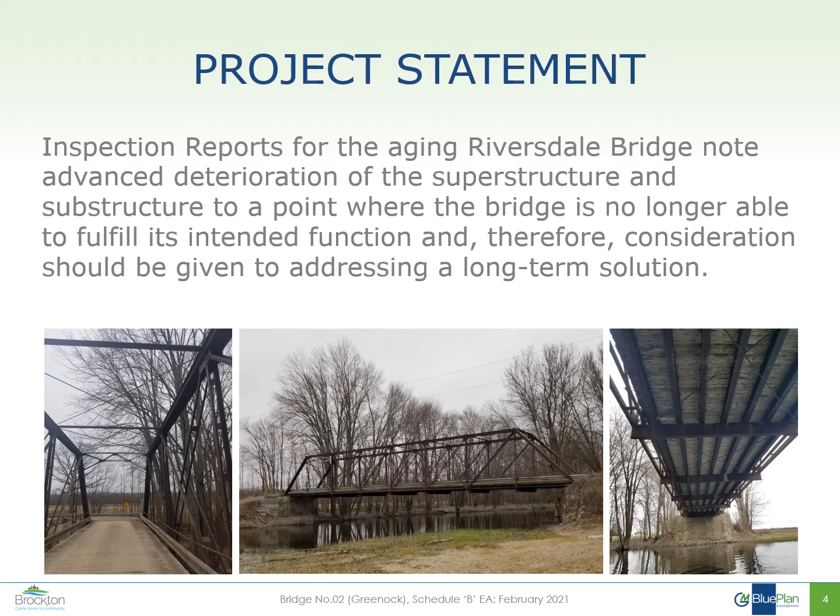Inspection reports for the aging Riversdale Bridge note advanced deterioration of the superstructure and substructure to a point where the bridge is no longer able to fulfill its intended function, and therefore consideration should be given to addressing a long-term solution.

This aerial photo shows the location of the bridge west of Walkerton and just north of Riversdale. It's a single-lane through-truss style of bridge and carries a very low volume of traffic. Following our recent inspection, it was closed to traffic due to its poor condition.

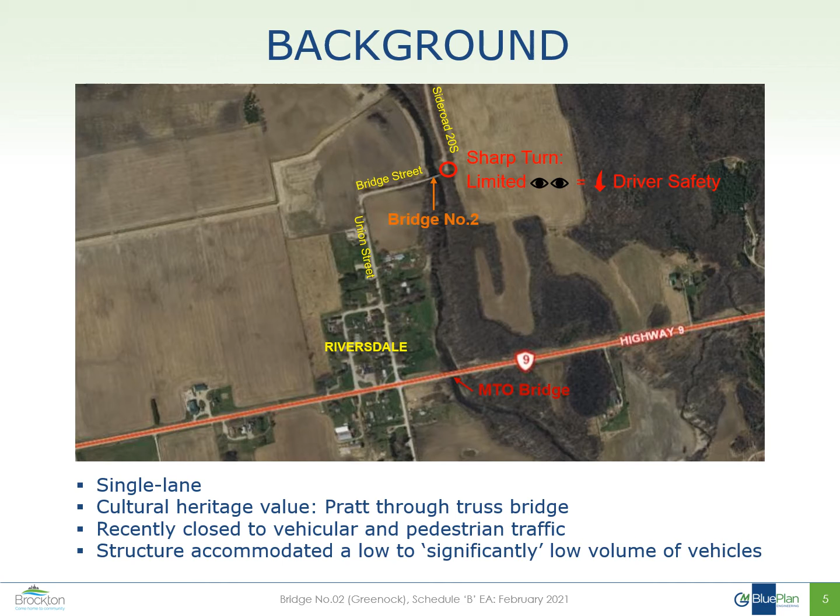There are 5 alternatives under consideration for this bridge. The first is to do nothing, which is not feasible for this project but is mandated to be considered in all EAs. The second is rehabilitation to maintain vehicular traffic. The third is replacement. The fourth, removal. And the fifth is adaptive reuse, which involves rehabilitating to a level sufficient for non-vehicular use.

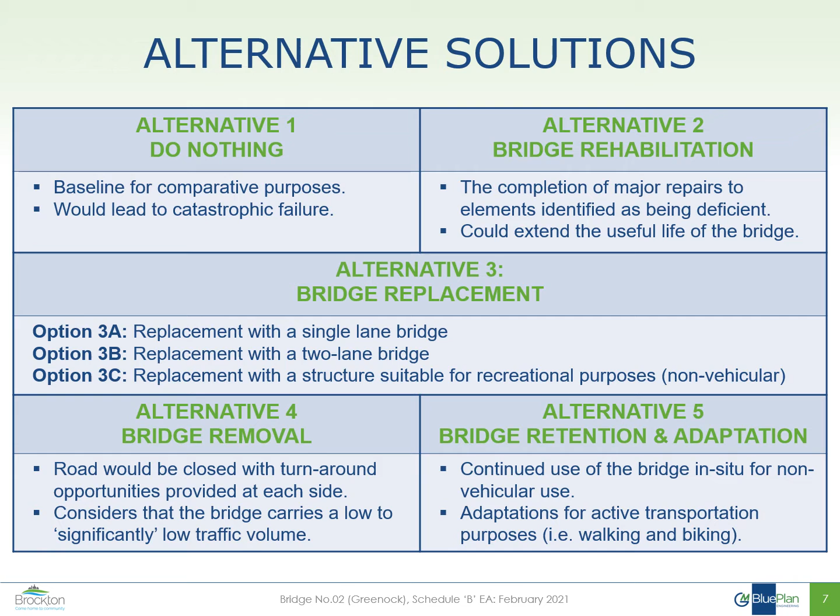A total of 6 criteria are being used to evaluate the alternatives. Notice that these include not only the natural environment, but also the technical, social, cultural, and economic environments.

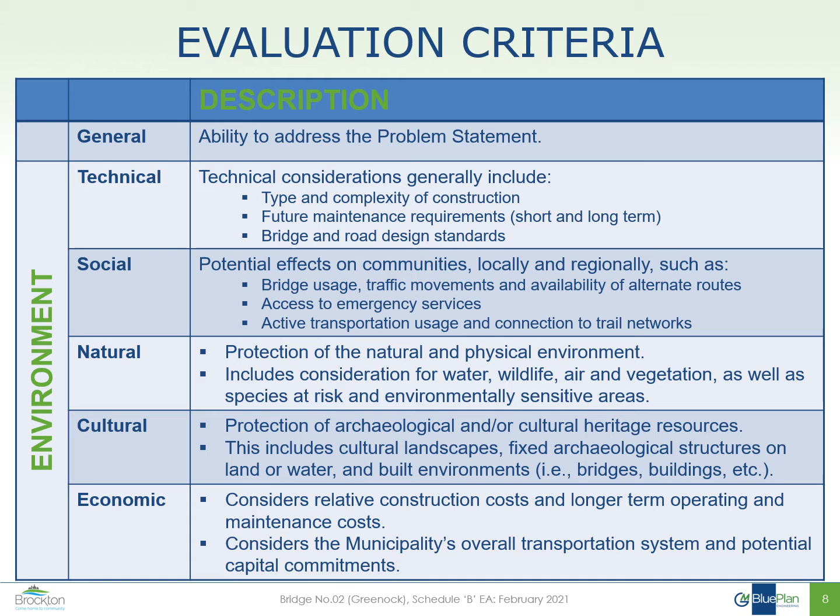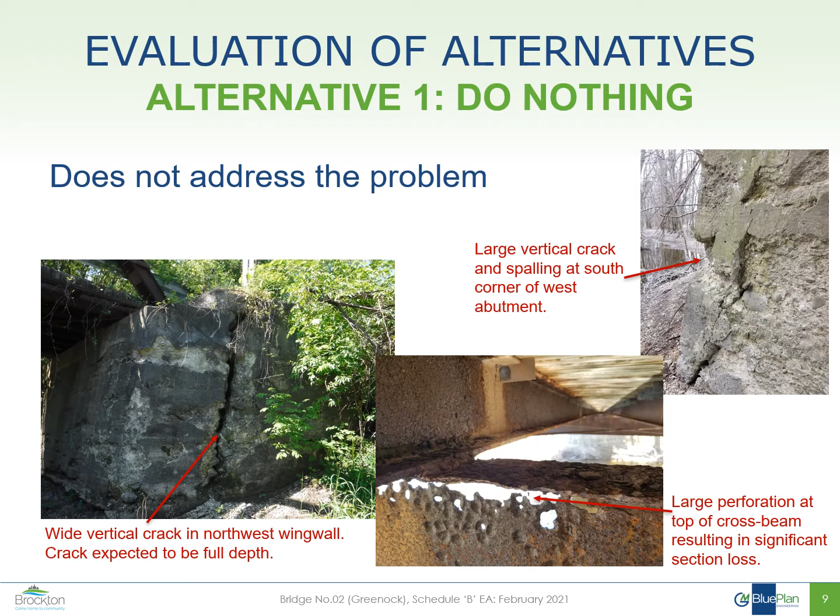The first alternative is to do nothing. As I mentioned earlier, this alternative does not address the problem and is therefore not feasible. It has only been included because it is standard practice to consider the do nothing option in environmental assessments.

The second alternative is to rehabilitate the bridge. Major repairs would be required, including significant abutment and superstructure work. A number of components in the superstructure would have to be replaced. Extensive rehabilitation work was done a little over a decade ago. Capital costs and ongoing maintenance would be significant, and frequent repairs should be expected in the future. Rehabilitation would only marginally extend the useful life of the bridge, delaying the need to address a permanent solution.

The third alternative is replacement of the entire bridge. This alternative has been broken into 3 subcategories. A and B pertain to vehicular use as summarized on this slide. Category C pertains to pedestrian and recreational use only.

Single-lane bridges are rarely considered nowadays, since they generally do not meet current traffic safety standards. However, given the low volume of traffic on this road and the sharp curves on the approaches, an argument can be made for considering such a bridge. Both the single-lane and 2-lane bridges would also maintain pedestrian access.

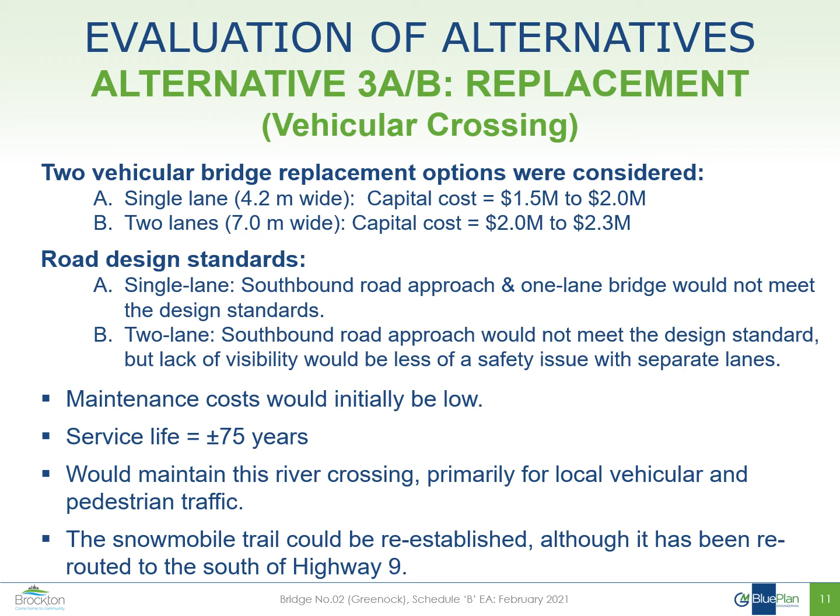This slide shows the locations of the various bridges that Brockton is responsible for. 2 bridges have been removed in the last 15 years or so, with 35 bridges remaining. Bridges usually have a service life of 75 to 100 years, so on average 1 bridge should be replaced every 2 to 3 years.

At present, 7 bridges are in need of rehabilitation work, so the combined cost of replacing and repairing bridges represents a significant burden for Brockton and its taxpayers.

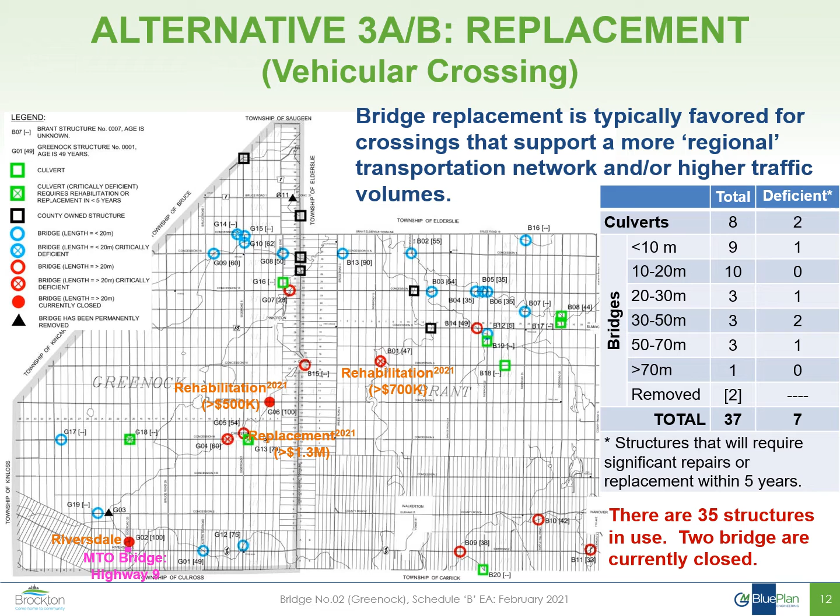It's worth noting that Brockton is responsible for 37 structures within its overall transportation system. The costs associated with maintaining these assets are significant.

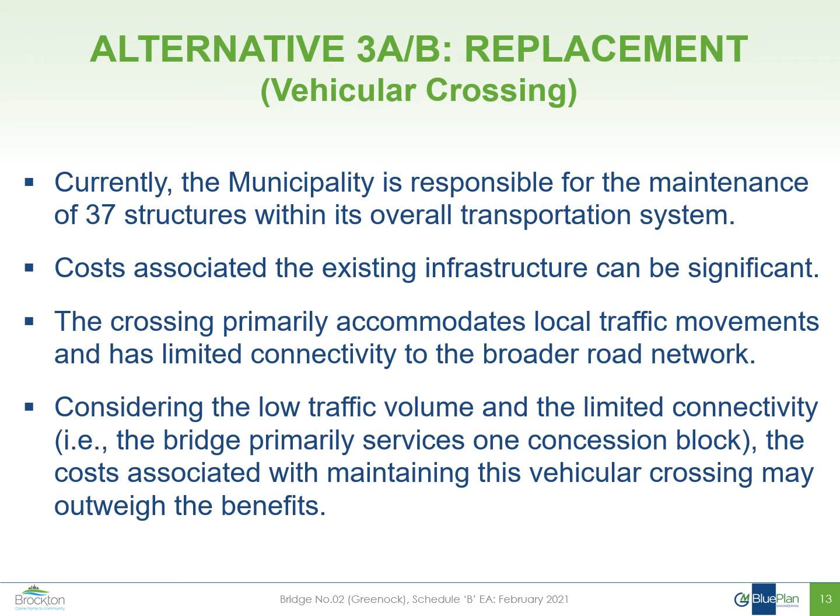The Riversdale crossing primarily accommodates local traffic. Vehicles traveling through the region would not consider this road to be an efficient route. Given the low traffic volume and limited utility for the majority of Brockton residents, the costs associated with maintaining this crossing may outweigh the benefits.

Alternative 3C considers replacement with a non-vehicular bridge. Use would be suited for recreational activities such as walking, cycling, ATVs, and snowmobiles. Highway traffic would not be permitted.

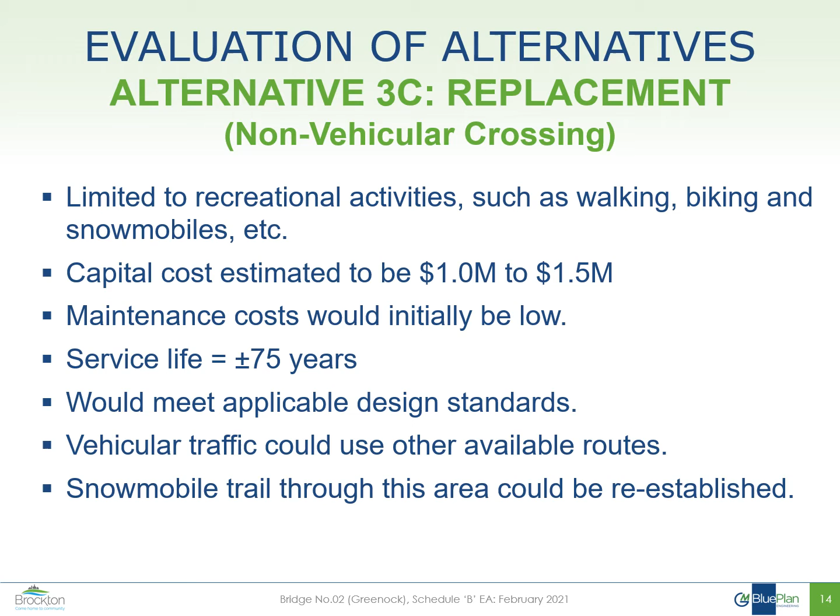In our experience, reinforced concrete has proven to be the most economical for achieving the 75-year lifespan required by the Bridge Code. Timber and fiberglass also offer durable solutions with similar lifespans to concrete, however they tend to be more costly. Bailey or Acrow bridges are normally used as temporary structures. As such, maintenance costs are expected to be higher, and they may not last 75 years.

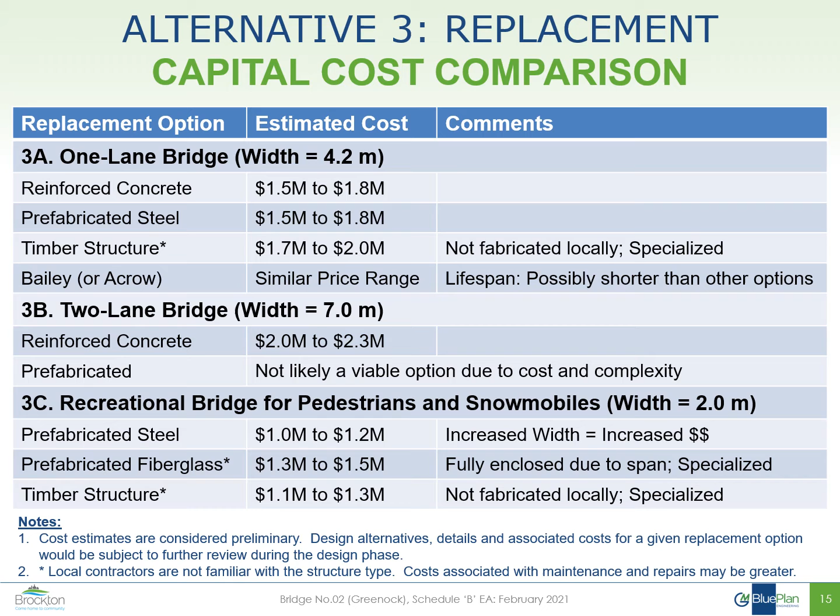Alternative 4 consists of removal of the entire bridge, restoring the riverbank back to its natural condition. Turnarounds would have to be constructed on the resulting dead-end roads.

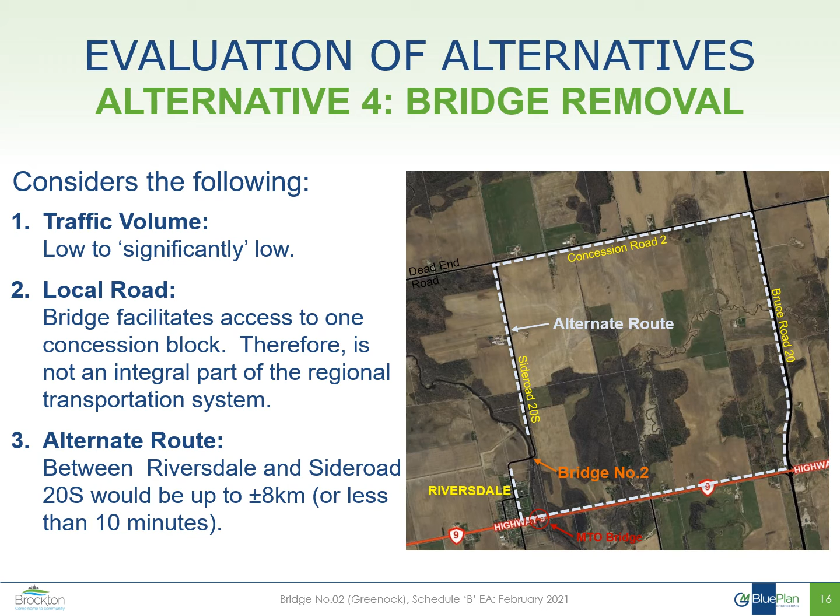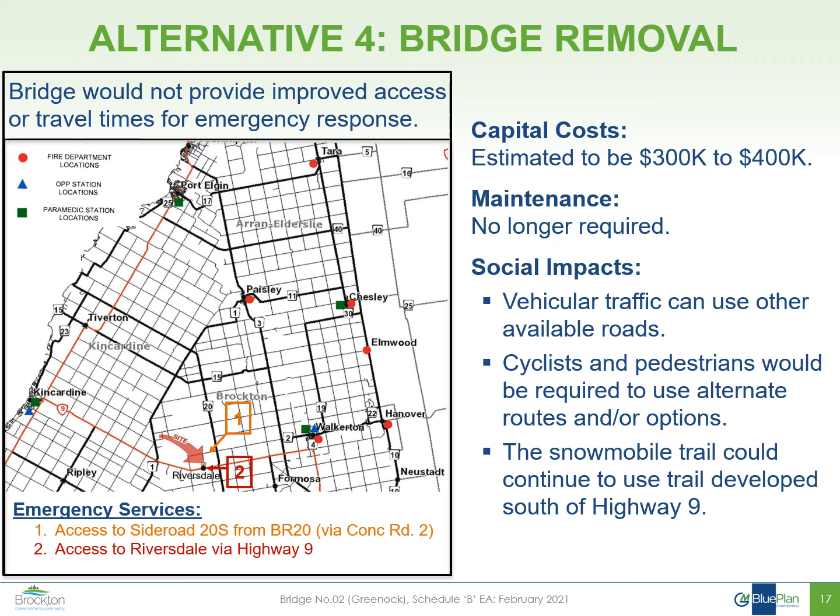Restoring the approaches to pre-development conditions will improve the stability of the embankments and flow hydraulics of the river. Capital costs for removal will be lower than the costs for other alternatives. With no future maintenance costs, there would be a long-term financial benefit.

Under the adaptive reuse option, vehicles would be prohibited from using the bridge, with only pedestrians and cyclists having access. In the past, efforts to restrict vehicular access at other bridges have been compromised, whereby barricades have been illegally removed to restore vehicular access.

The natural environment would remain virtually unchanged under this alternative. Retention of the structure would most certainly be preferred from a cultural heritage standpoint. Capital and maintenance costs would be significant due to the age of the bridge and ongoing maintenance requirements.

As discussed for the bridge rehabilitation option, this solution is not viable over the long term without a significant financial investment.

Rehabilitation offers a cultural heritage benefit, but the high costs and minimal lifespan may significantly overshadow those benefits. Replacement offers distinct social benefits to the local community, but again, at a significant cost. Adaptive reuse provides social and cultural advantages, but again, at a significant cost and for a limited duration. Removal offers technical, natural, and economic benefits at a reasonable price, and for this reason is currently considered to be the preliminary recommended solution.